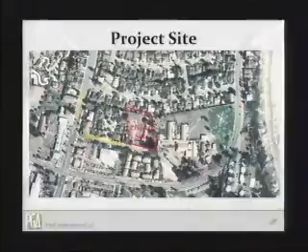You've seen the site, as Allison showed you. There's Cliff Drive here, and Lighthouse Road, and the school. As she indicated, the site is about 1.65 acres. The on-site uses have been the church and accessory structures. She went over the zoning, and the slope is about 3%.

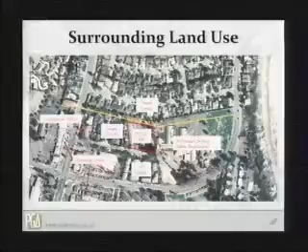History: in January 2007, we first came to the Planning Commission with a concept that we felt was suitable for the area. It was a condominium project, thinking that this was an ideal location for infill development of attached units. It had 22 condos with 6 affordable. In that conversation, we discovered that the Planning Commission really felt that the neighborhood was more single-family oriented, but supported the concept for including affordable units in a more single-family oriented project.

So there was not support for the rezone at that time. We went back to the drawing board with the applicant and tried to figure out a way to incorporate affordable units into the single-family development. We came up with a concept of creating 7 market rate lots and 3 affordable lots, and had been working with Habitat for Humanity on that concept.

We also had developed a concept of a walk street at that time, which we had presented to the commission, and there seemed to be general support for that design and overall support for the basic concepts. But there were some questions about the affordable component and whether or not those 3 affordable lots really worked in this neighborhood, and how they would be integrated, and how the homeowners associations would work together. So we went back to the drawing boards after that conceptual meeting and tried to resolve some of those concerns.

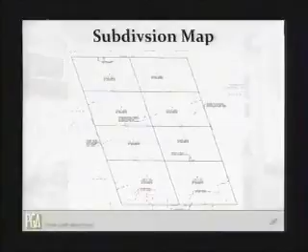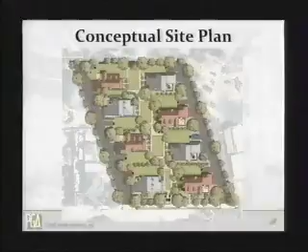So here's the subdivision map as Allison had shown you. Here are the 8 lots. And this is a conceptual site plan that gives you an idea of what it might look like when it's built out. The objective is that this property would ultimately be sold and that all the units would be built at one time as a standard development rather than selling off individual lots.

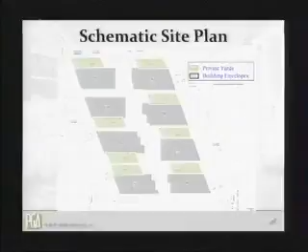So this shows the building envelopes for each lot as well as the open space areas that are set aside for yards. One of the issues that had come up at the last concept review meeting was that the neighbors along this boundary had been concerned because one of the units had been nestled up against that property line. What we did was we flipped the unit and the open space so that we could create a buffer between this house and the neighboring property.

With respect to the tree removal, one of the issues discussed at the committee was the removal of the eucalyptus trees here in the southwest corner. The primary reasons for removing the trees have to do with the new alignment of the sidewalk there. The sidewalk currently juts out this way, and now we have to bring it in and align it with the sidewalk to the north, and that's going to result in removal of some trees, as well as the placement of the driveway along the southern property boundary.

There had been some concerns expressed by the school district about hazards associated with the eucalyptus trees. They're quite tall and can be rather unsteady in high winds. This area is the entrance to the school as well as the kindergarten and play yard area. So the school district wrote a letter to the street tree committee supporting the removal of those trees.

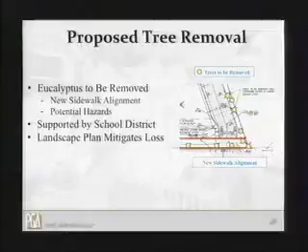But we also understand the desire to have trees in the development and to maintain skyline trees. So as a way to mitigate for that loss, we proposed a landscape plan that would be reviewed and ultimately approved by the Single Family Design Board. Here's the conceptual landscape plan that shows plantings along the property boundaries and then through the common walk street area.

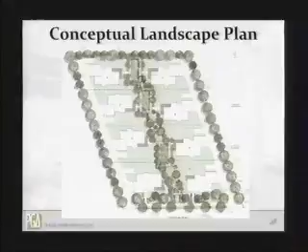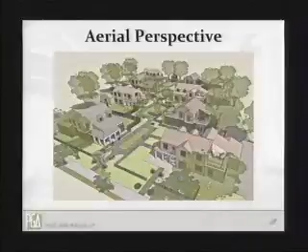Just to give you an idea of how the guest parking would be associated with the garages at the rear. And here's some walk streets that I think you've seen previously, but they're used in different areas around the country and are quite successful.

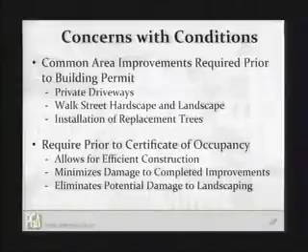With respect to conditions of approval, we had originally spoken with Allison about changes regarding timing of implementation or installation of those common area improvements. Staff has supported those changes, so I don't want to spend a lot of time going through them. Essentially, it allows for the common area improvements to be made prior to certificate of occupancy if all of the lots are developed together, which allows for efficient construction and minimizes disruption.

The primary conditions we really want to talk about relate to the Washington School Foundation's requests. With respect to the noise conditions, they had a series of conditions they wanted to include in the project that had been included in the Meigs Road project. We've agreed to those in general, but we want to make sure they're only applied to lots 5 through 8, which are directly adjacent to the school, because we felt those were the most critical units, and the other ones were far enough set back.

The other change was they had a condition that required dampers and glass doors on fireplaces, and we thought we'd be happy to consider them, but we didn't want to force that if it wasn't something a resident wanted. Then with respect to disclosure, the foundation wanted the owner to develop a disclosure statement about the Washington school activities.

But we felt that it's really the school district that ought to be preparing the statement about their own activities and then provide it to the owner, because the owner doesn't have enough knowledge about what's really going on or what's planned in the future or their events.

So we tweaked the language a little bit so the district would be providing that to the owner, and ultimately future owners or tenants would have to sign a notarized document indicating what those future activities are like, that there are events and possibly construction at some point, to minimize any unanticipated conflict between the school and future landowners. Apparently the school has had some complaints from surrounding property owners, and they want to reduce any potential for problems.

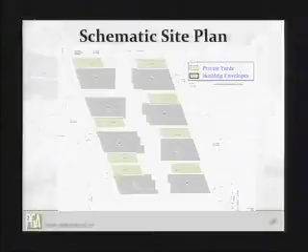Correct. Chair Larson and Commissioner Bartlett, one thing I would like to point out, although the applicant has submitted these schematic site plans, the building envelopes proposed are simply the setbacks, and so there is nothing that would dictate that this particular layout be the one that moved forward, unless it were to be conditioned as such.

So the depicted open spaces aren't really part of this—it's only the setbacks within each lot. That's correct. 1,250 square feet of open space is required, but which side of the lot it goes on is still open to interpretation unless it's something that you condition into the project.

I think we would be open to having a condition that indicated that the open spaces were provided along that eastern property boundary. I think we all like the concept, so we'd like to make sure there's some assurance that this is what's going to come back, down the road—who knows how long that would be. Yeah, and we're open to that.

Okay, and I would certainly be able to support the project as well. Thank you, Ms. Lodge. Oh, I'm sorry. Oh, that's all right. All right, any other questions or comments?

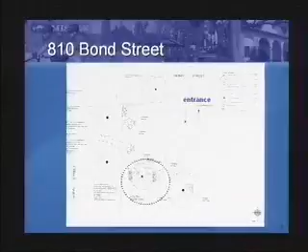The project went back to ABR for consideration in May of this year. At that time, the applicant came forward with more evidence that punching through the concrete slab would compromise the integrity of the slab. So the ABR went ahead and continued the item, and the applicant is back before you for substantial conformity to not put in the tree and eliminate the line that says the final design shall include a 24-inch box tree planted in the ground.

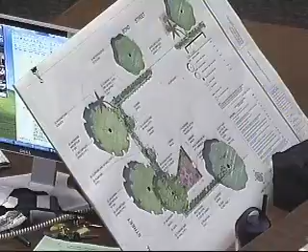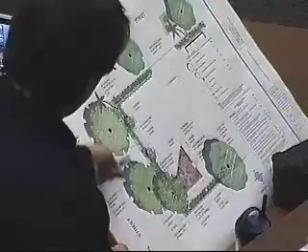I've got a photograph here — essentially this is where we are, this is Nopal Street, shot that way. There are two existing specimen jacaranda trees here and here, and they were suggesting perhaps we could plant it in this narrow planter just outside the wall, which is where Steve is pointing now.

I think, frankly, that it provides, at least goes a long way to providing some shade for that area. But I'm also sort of depending on the opportunity for maybe some nice patio furniture with an 8 or 10 foot umbrella at that location.

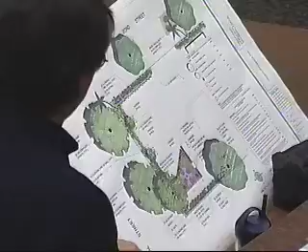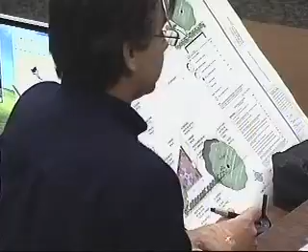But so what we are looking to do then, and this is that direction of ABR's, is kind of expand this paved area, if you will. So essentially what we've done is this triangle adjacent to this parking stall, and we've got a handicap zone here, but that would be filled in. And then here's another angle looking towards Nopal Street. So this whole area would be paved.

And then because we're basically dealing with trying to create some greenery on a hard concrete deck, we had a couple of different ways to go. There was the opportunity to do pots with lattice and vines on them. And to be honest with you, while I think it's probably a fine idea, I think ABR was looking for an opportunity to create a little bit more green separation, more continuous and more definitive separation from the parking area.

So what we're proposing as part of this plan, as described on this plan, is, and this is just sort of a little mock-up, we can get these raised redwood box planters. We probably have to line them and waterproof them appropriately. But they would basically be along the perimeter there, along that side and there, with an opening to get in from the parking area. And on top of this, we'd have these sort of prefabricated lath screens, and we can grow vines up on them and kind of create a nice sort of green enclosure for that space.